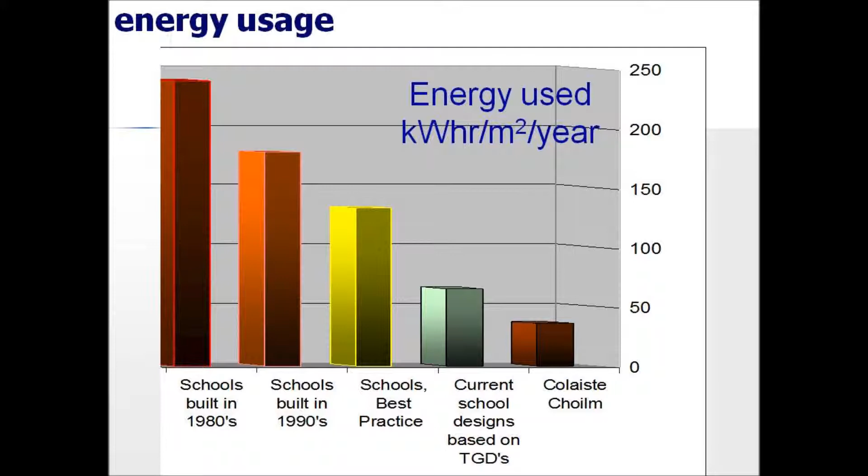Colaiste Choilm then is a post-primary research project, and again we're dropping that even further down. And we have 2 passive schools currently on site, and they'll reduce that energy even more so. So, our Biomass Research and Demonstration project.

Today I'm going to give you an overview of the program, some feedback that we got from our customers, the school principals, just a snapshot of the fuel supply chain, and some discussion on our initial findings and conclusions to date.

So the program was really put in place to test and evaluate biomass systems. Any system, or any design, that we put into schools, we tested in a school project before it's rolled out nationally. The objective was to reduce the energy in use and increase CO2 savings. And again, we weren't just testing biomass boilers - that wasn't the intention. We knew the technology worked for the world, but it was how that technology would fit in an Irish context with the other variables on a school site.

One aspect, a small aspect, was to evaluate the appropriateness of combining solar with biomass. Another was to monitor the performance of the systems, to develop a suite of case studies, and to develop a best practice guide. Through the project, we added another one, which was to evaluate the potential for an ESCO model as well.

So we have 15 schools in all on 14 different sites. They range from primary, post-primary, new build, refurbishment.

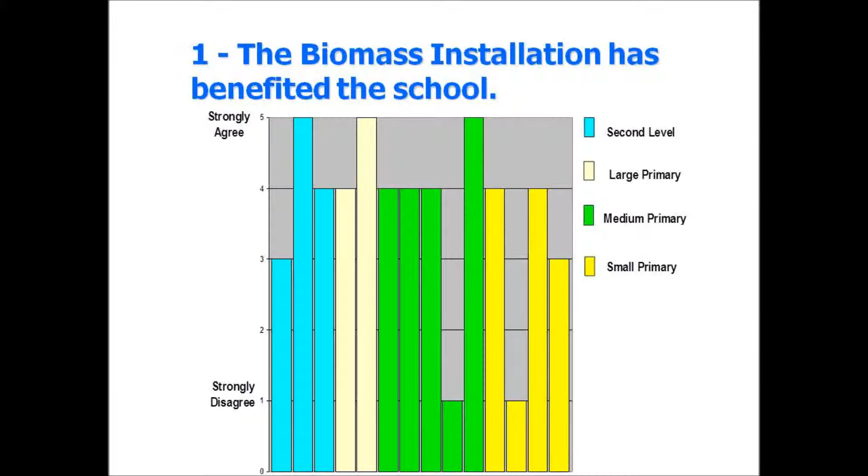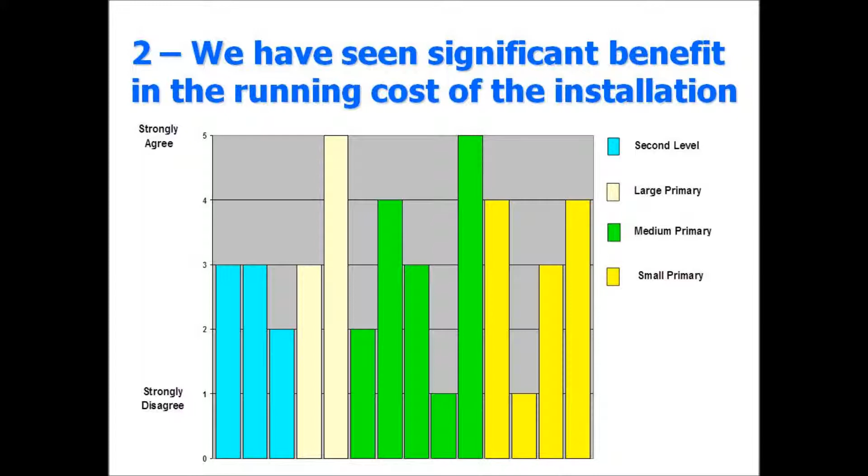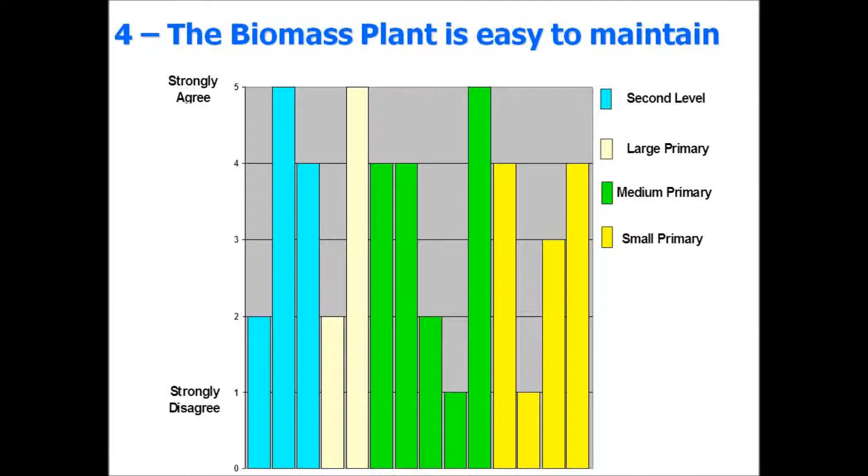Was the plant easy to maintain? Again, very much a mixed bag.

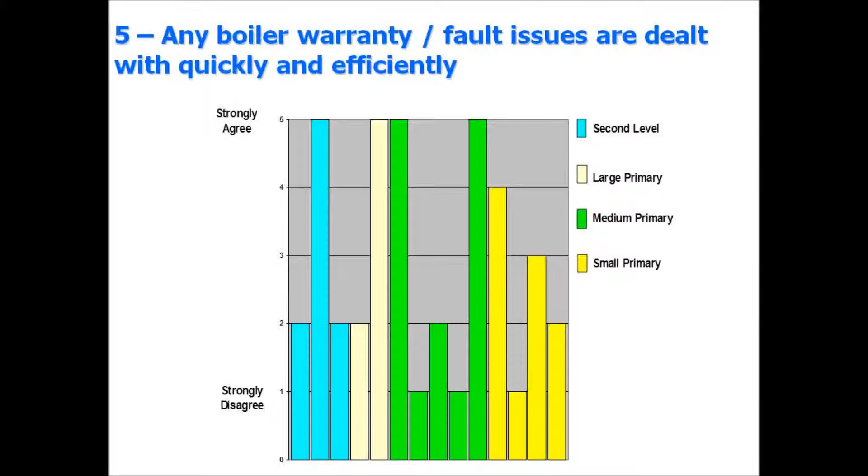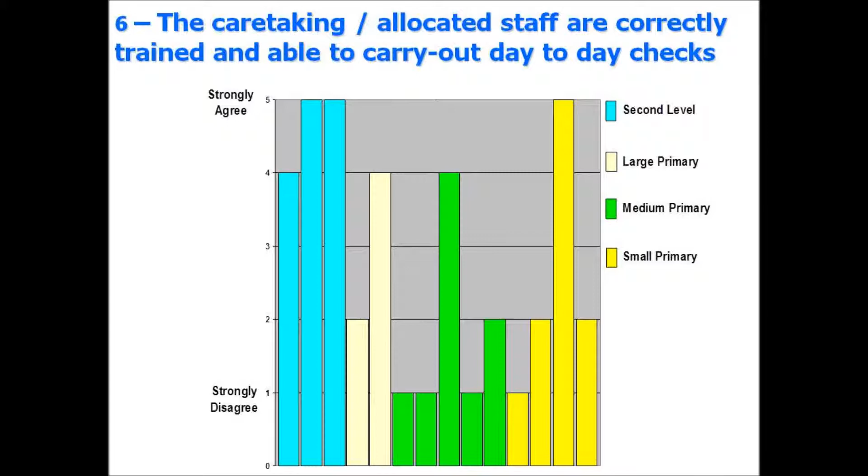Now, with caretaking and allocated staff correctly trained and able to carry out day-to-day checks, again, a mixed bag. There was significant training given to all these staff members, and I witnessed some for myself. But again, there was significant nervousness on behalf of someone who doesn't know heating systems to start with, being told about how to deal with these biomass systems.

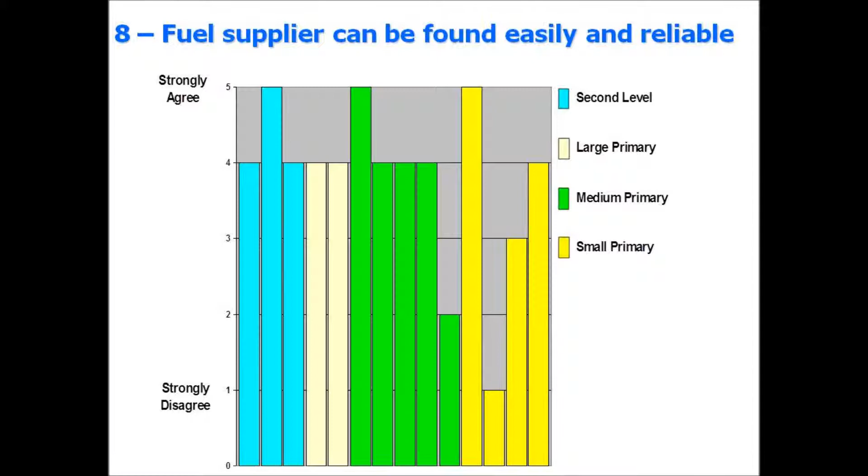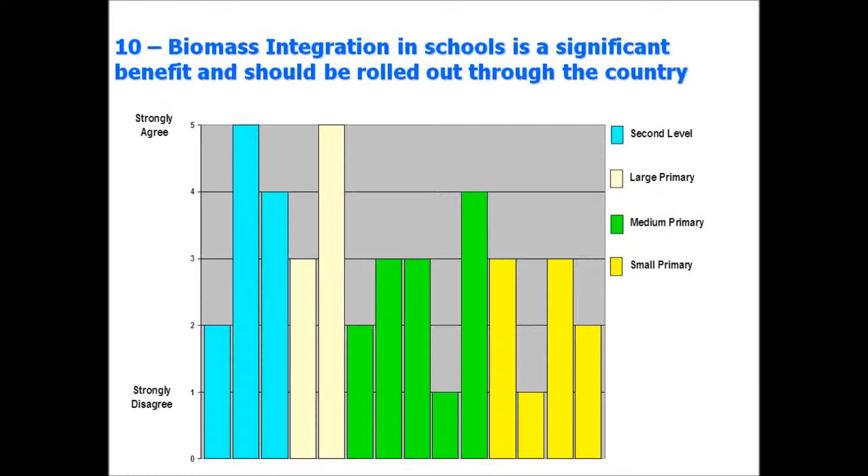And the biomass integration in schools is a significant benefit and should be rolled out through the country. Again, very mixed results in the scenarios there. Individual average responses and the overall average responses - but by and large, the end result was about a 60% satisfaction rate with the biomass systems, which wouldn't enable any department to roll out a scheme nationally on that basis.

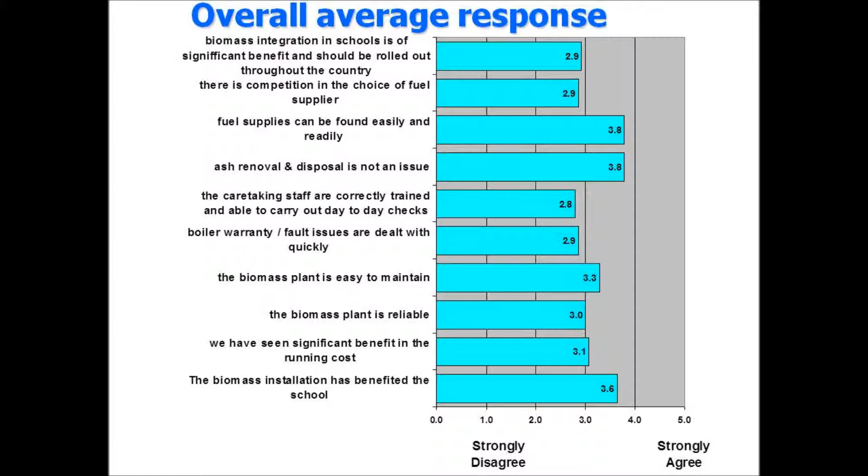Our initial findings show mixed feedback on the success of applications. Fuel delivery - there were issues there in some schools, nothing that hadn't been overcome and shouldn't present a problem in the future. Fuel storage was a big problem with some of the earlier projects due to unreclaimed pellets. The pellets stack up in the corners of the fuel stores and can become quite significant if not addressed within the fuel store design.

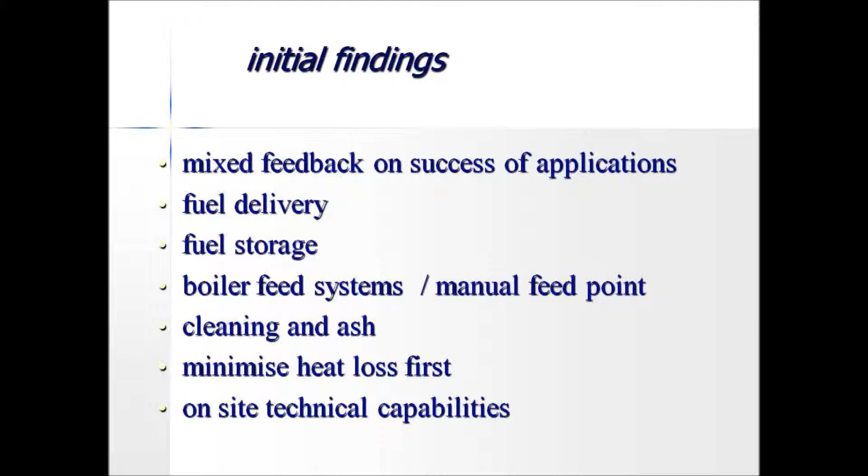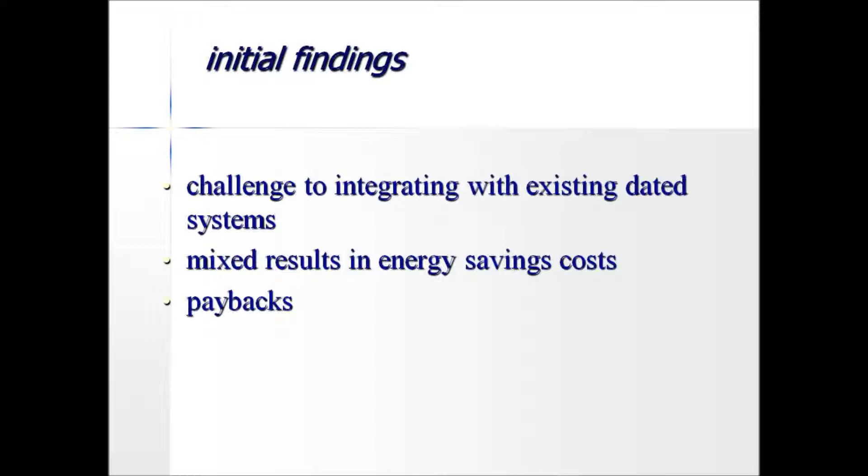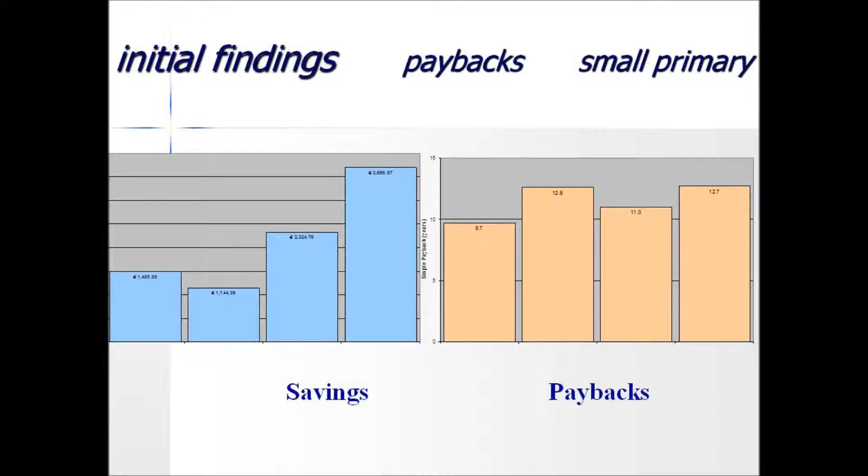Our initial findings show the service industry does need to develop in this area, and even since I gave this talk last, it's going through significant changes in very hard times.

The disruption potential to school management can be quite significant if these go wrong. We had one school where the principal was educating something like 7 different technicians who came to deal with a problem over a number of weeks, a different technician every time, so he was explaining again and again instead of being in the classroom educating the kids. In a school where the principal isn't teaching, they can allocate some time for that, but where you have a teaching principal, you have a classroom of 28 or 30 delighted kids while the principal is outside dealing with the boiler house. That's not sustainable in the school environment.

There is significant potential education value there, and there is certainly a reduction in carbon emissions.

The boiler combustion can vary, the sensitivity of them can vary. I would class them something like supermodels - some are very fussy about what they eat, what they burn, very sensitive to fuel type. Others will burn your arm off if you leave them long enough and work away fine. So there's that variation as well. Control strategies are quite important too, that they're matched up to the systems, and as I said, two may be cheaper than one at the time we're doing this.